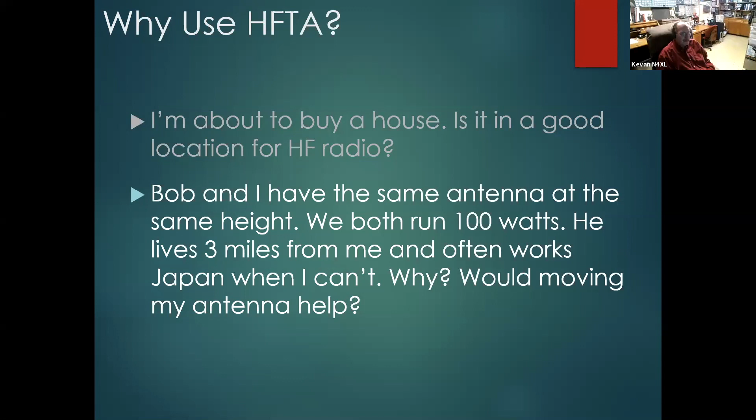I use the ARRL Antenna Book quite a bit for different things. There's operating instructions for HFTA. When I wrote this it was version 1.04, I don't know if he's changed it or not, but if you read those little instructions that accompany the program that nobody ever really reads, there's a few interesting things in there, and we'll talk about them later on at the end. And we got a couple 3D things to take a look at, some other stuff to take a look at.

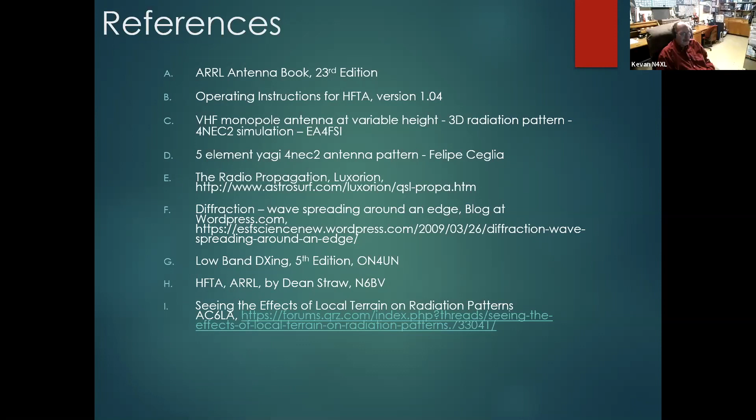The actual program HFTA, if we've got time at the end of the hour, we'll run a couple of things and show you how easy it is. We'll talk about some of the things that have happened since Dean wrote it. Some other people are getting some interesting uses out of HFTA for 360-degree angles and things.

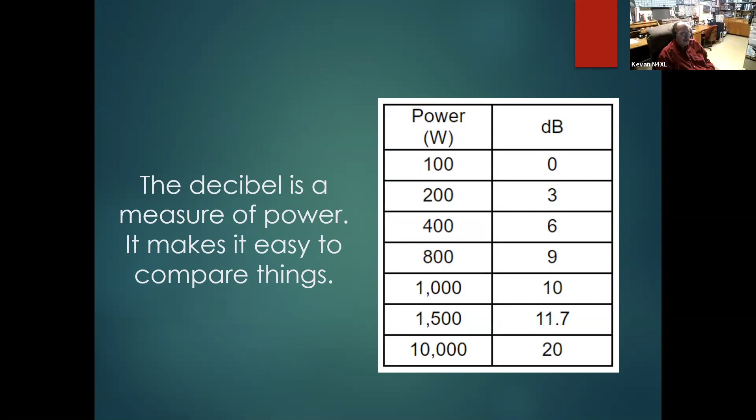A lot of people think the decibel's a hard concept, or they don't really know what's going on about it. So I want to take a minute and make sure everybody's up to speed here. And decibel, in the case we're looking at, is really just kind of a measure of power. It's a way to easily compare things. If you double power, like going from 100 to 200 watts, doubling power is 3 dB. By the same token, halving power is minus 3 dB.

So a lobe, we're used to thinking about it going in a direction like this, due north. But a lobe actually goes in a couple of different directions too. We have these things called takeoff angles, which is from where the transmitter is. We're looking at the angle between the radio wave going off and the earth. And this is a very low or shallow takeoff angle. It tends to go a little bit further.

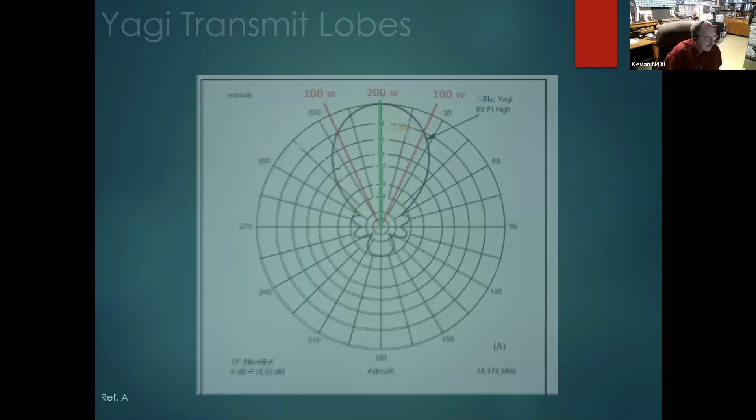The higher angle ones go up, and they do a little bit shorter hops. So that's what we're referring to as takeoff angles and arrival angles. They're pretty well reciprocal as they come in like that. And different distances, different points on the earth are going to have different takeoff and arrival angles.

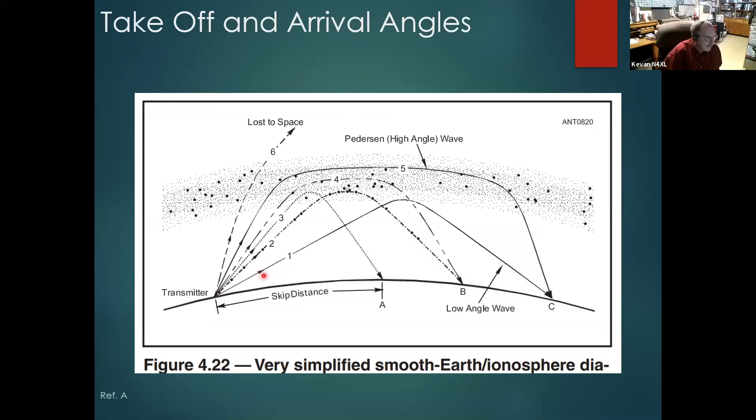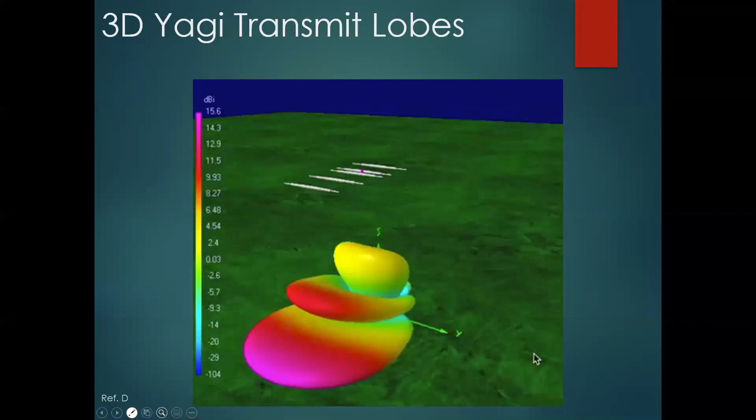Here we go again. Sounds like you may be having a connection issue. We're not seeing your screen right now. We could hear your audio, but not seeing your screen. What is going on? I've given 2 presentations on Zoom since getting this new internet without a problem. So I don't quite understand. In the Army, we said Murphy and 1-arm push-ups. Are you seeing the screen now? Yes.

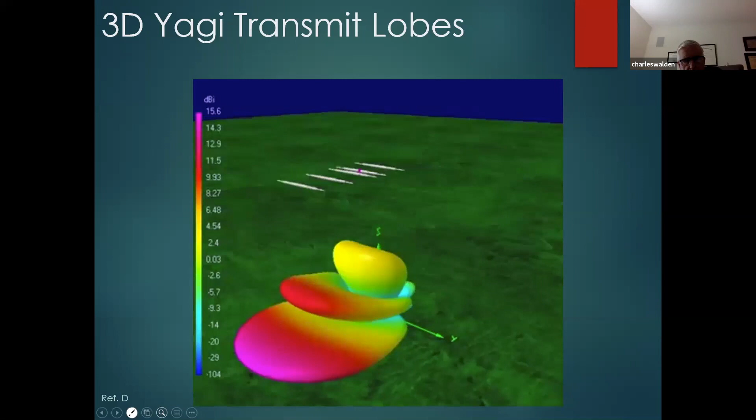Okay, so this is a 5-element Yagi. Hopefully this will stop doing whatever the heck it's doing. 5-element Yagi, and it's showing the lobe strength. This is your main lobe, and then as it goes up, you see some different changes to it. So the Yagi pattern isn't just one particular straight lobe. And this is looking at the back part of it over here.

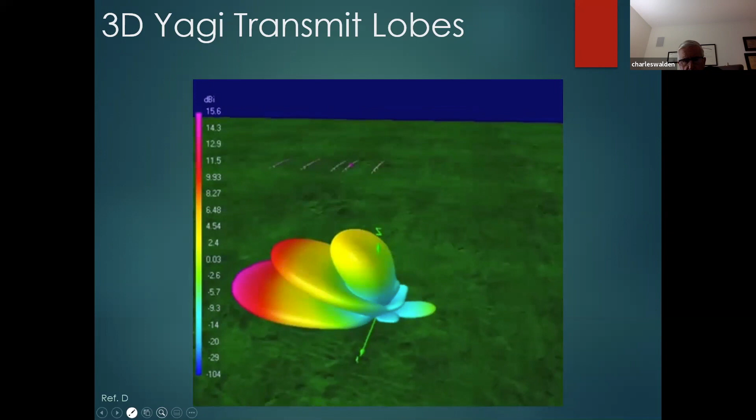There's all these different lobes coming up. And these lobes hopefully line up with the takeoff angles coming in, so you get the strongest energy coming in. Not only do you have a directional lobe, this is actually a 2-meter ground plane antenna, but as the height goes up, you also see the lobe changing as well. And when this started out, it was at about 0.6 dB. So while you're watching these lobes change, also look, you see a dBi gain change too.

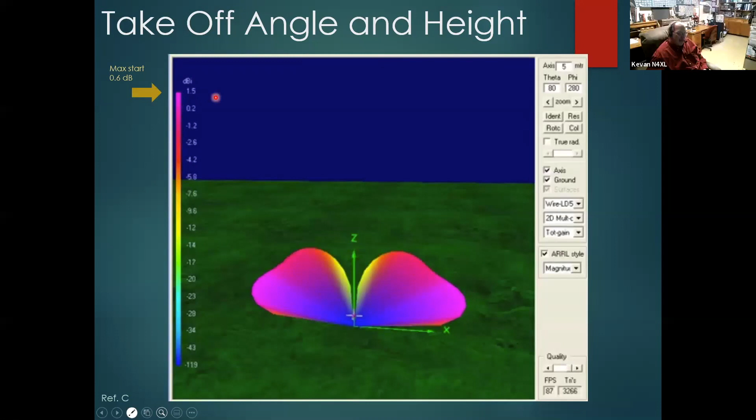So particularly new hams don't quite realize that the height of the antenna affects both the gain and the takeoff angles associated with the antenna. And a lot of times, I did for the longest time, tend to think that there isn't any reason why an antenna at 30 feet shouldn't operate almost as well as an antenna at 60 feet. More experienced people know that's not quite the case.

Gonna let this run its course, be about another minute or so. It's kind of interesting to watch. I put it down a little bit. But if you're not getting the proper response out of your antenna that you think you might, then exploring the antenna height is a good way to look at it. And as it goes up and down, things change. So that's pretty much what we're looking at for two different things. You got multiple lobes, and as you raise the antenna up and down, you change the angles that those lobes are going out at.

This comes out of ON4UN's book, and it talks a little bit about the arrival and takeoff angles. There's other sources for it. I just chose this one because it's simple. And if you look at the case for the USA East Coast, most of the time going into Europe, things are arriving at a 1 to 38 degree angle, with this thing in parentheses, 6, being the most common. And this is for a 40 and 80 meter path. Of course, there are all kinds of variances, and we'll see some of them later.

Going to Oceania from here, it's extremely low angle, like 1 degree. And the same as South Asia. I have a heck of a time getting into Oceania and South Asia, and that's why, because of the extremely low takeoff angles. But these charts are out there to tell you a little bit about what the takeoff angles are too.

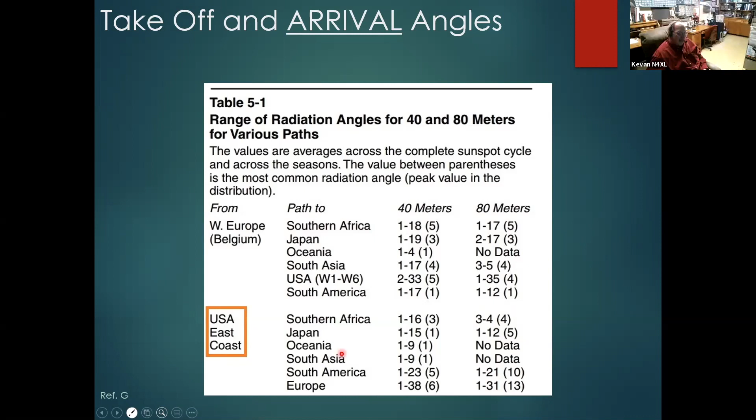Dean Straw came up with this great tool. A lot of people are familiar with this. It comes out of the ARRL antenna books. And it shows, in this case, 80 meter heights for a dipole. 1/8 wavelength high is 33 feet, 66 foot is a quarter wavelength, etc. And this shows the gain at the particular takeoff angle. And you can see as it goes up in height that these lobes start coming down.

Most US comes in about this range. Most DX is a much lower angle range. And that's kind of important as we go along. If you zoom in at this a little bit more, what Dean did to come up with some of his charts is he actually flipped this on its side. And now what you're getting is a graph which shows the takeoff angle right here. And then we can start plotting the gain at a particular takeoff angle on a chart that looks something like this. So here you got your takeoff angle, 0 to 25, and the gain coming up along those directions.

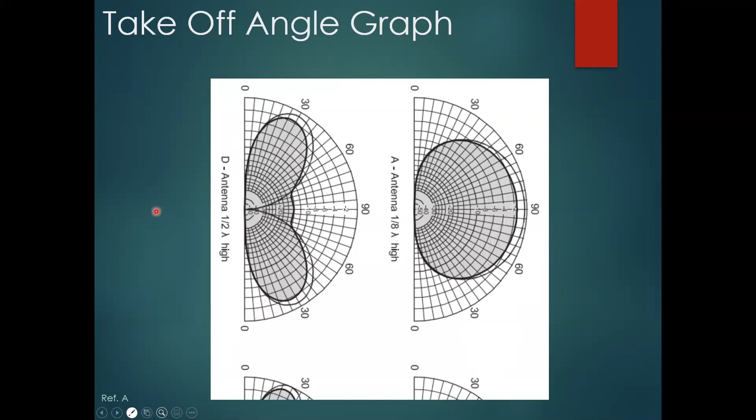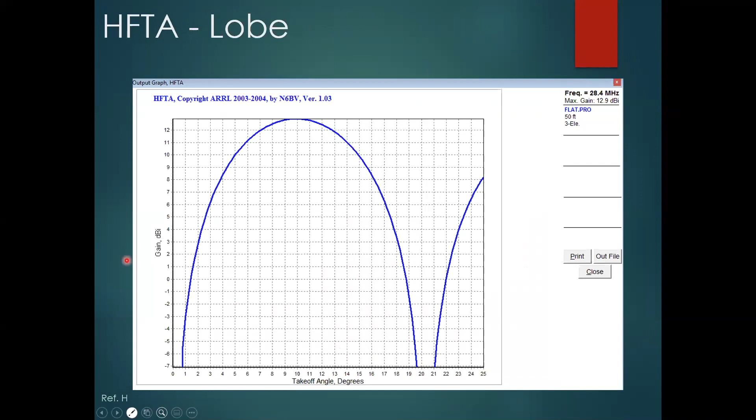And if you go ahead and put that in there, here are some of the lobes and the gain that occurs at every particular takeoff angle. And just as a reminder, we looked at that just a minute ago and turned it on its edge. This right here is that main lobe, and then you got a second lobe right there. It's plotted coming up from there. So now we got a way to start looking at what the gain is at a takeoff angle in a graphical format. Beyond those takeoff angles to different parts of the country, this starts throwing in what percentage of the time a signal comes in at 7 degrees.

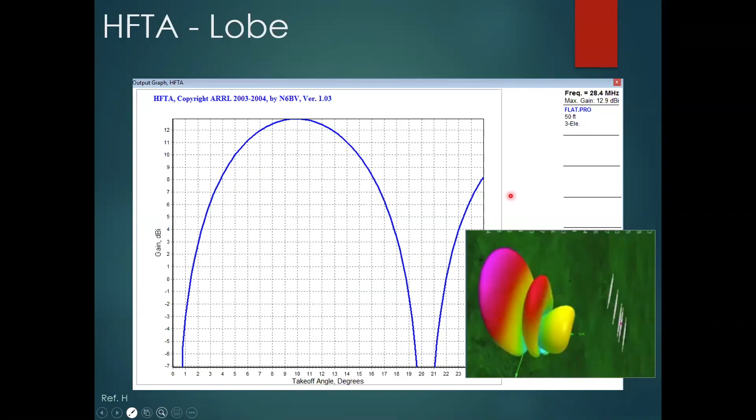This is going to be a long session. Comes in at 7 degrees. Yeah. Okay, is it appearing right now? I said, I apologize. I've never had this problem in any presentation yet.

So it comes in at 7 degrees 10% of the time. At 20 degrees, it only comes in at 2% of the time. So what we're going to want to do is try to get that lobe of the antenna to cover the angles that are coming in the majority of the time. And that's what we have right here: we overlay these gain lobes over the takeoff angles.

In this case, I'm using a takeoff angle screen, which shows South Carolina to Europe, and you can choose the different areas that are available out there. And this is over flat terrain at a 50-foot elevation. And the other thing I'll point out here is there's something called a figure of merit.

What Dean did is he's trying to come up with a value that says, okay, you got a gain here at that particular takeoff angle, you got a gain here at that particular takeoff angle, and he's using kind of like calculus to figure out how well this particular curve does over the majority of the takeoff angles. And we'll start seeing how things don't work out in the next couple slides, hopefully, if this thing stays with me.

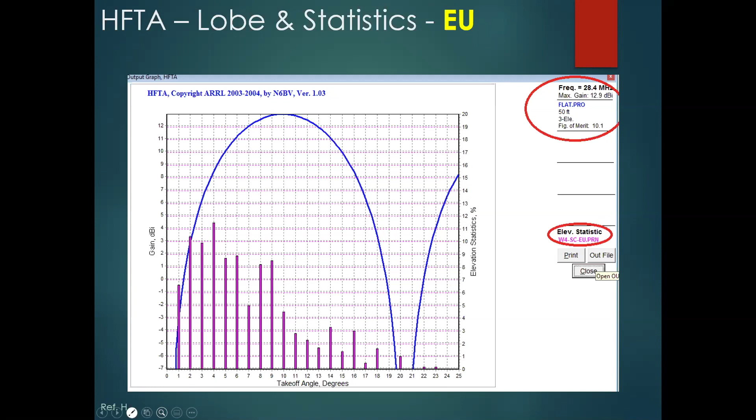This is looking at two curves for an antenna at 30 foot versus 70 foot. Obviously, the gain that occurs at the higher angles is going to be the lower antenna. The blue is the 30 foot. It has a figure of merit of 5.4, but going up to 70 foot, you get a figure of merit of 9.9. So it's worthwhile in this case, obviously, going from a 30 to a 70-foot antenna.

Again, we're looking at European takeoff angles. And you got to do that comparison for each one of the areas that you're going to, Asia, Japan, Africa, South America, to get the overall picture of what's going on, unless you just want to try to work one particular direction.

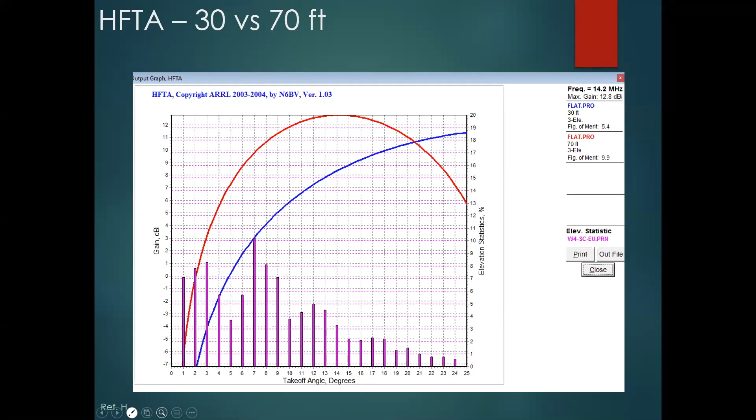A lot of people say that a higher antenna is better, and they'd love to have a 180-foot antenna. So I laid these three out, 50, 70, and 180 feet. And if you start looking at this, this lobe right here at 180 makes it so that sometimes that 70-foot, sometimes that 50-foot antenna just whoops the crap out of that one up there at 180. In fact, the figures of merit for all three of these are pretty close.

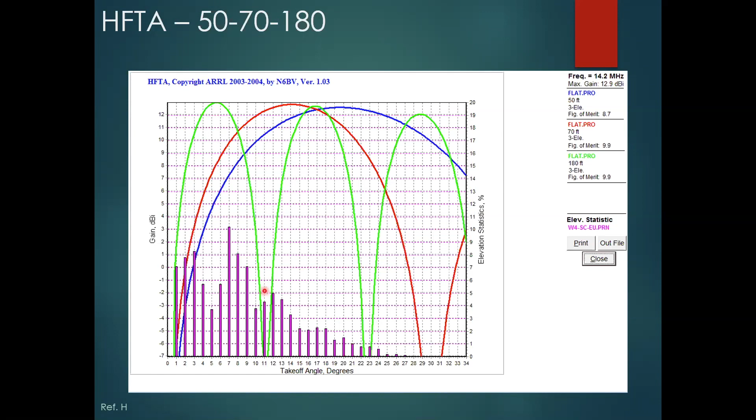And if you look at the next thing, this right here gives you a 20 dB gain just with a 70-foot antenna, and pretty much a 50-foot antenna, over something that's at 180 foot. That's one reason I don't give up being a little pistol station trying to go up against somebody with a big antenna. Now, if they've got stacks and cover all these angles, that's a different story. But sometimes, not all the time, I whip up on them boys with the big antennas, and that's one reason why right there.

And if you run them at the same time, you get an extra couple dB. And that's why people like stacks, because you can cover this whole direction. And oftentimes, one or the other antenna beats the other. All righty, so we left off talking about the two and how they add together to give you a couple extra dB. And that's basically how a stack will work as well.

I've heard of people who did stacks and put them up and they didn't work worth a darn and they couldn't understand it. Well, they fed them out of phase. And when they did that, they ended up changing the lobe pattern. And when they started running them like that, obviously it made it much worse. So that was kind of interesting too, to have HFTA show you that.

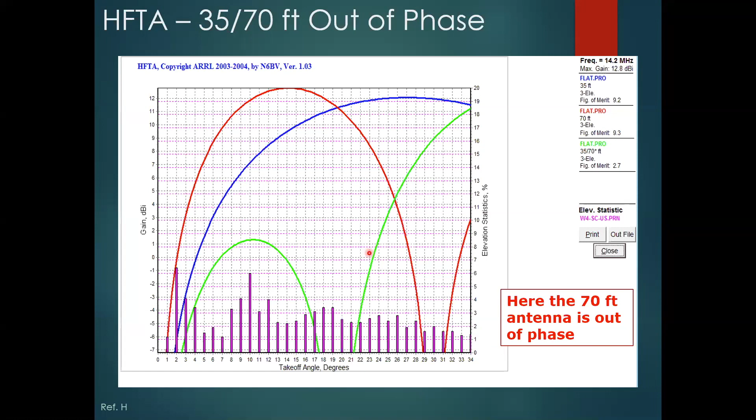The thing about HFTA, which really makes it useful besides those plots, is that the terrain around you has a direct effect on it. Your antenna signal sends stuff off and bounces off the ionosphere, but it also sends it down here to the earth and sends it up. And then these things interact up there in the air and it changes your antenna signal a bit.

And one thing that works on that, I found this picture kind of interesting. Some waves are coming along in this direction, but notice when they hit a point, they change direction and it actually causes a deflection at a different angle. And that actually happens with the terrain and a radio signal just as well. It hits a high point and starts going off in different directions.

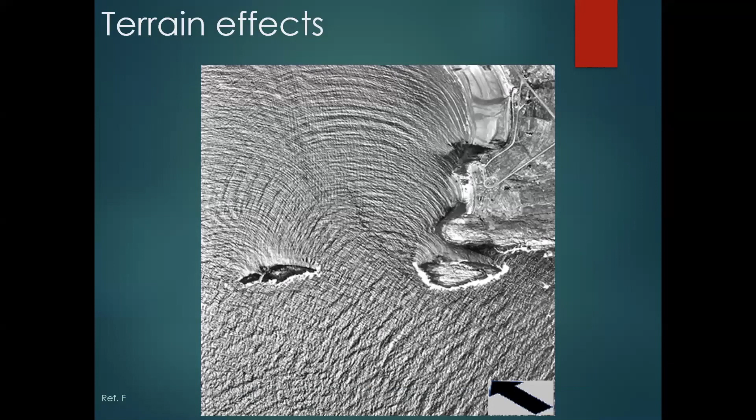And Dean Straw's whole point about HFTA was to figure out how all these little terrain effects affect the signal going off in the air. Because these things come down here and they add up, going directly there. You also get the ones coming down here that add up, back and forth, and trying to figure all that stuff out, it's quite the task that he went through.

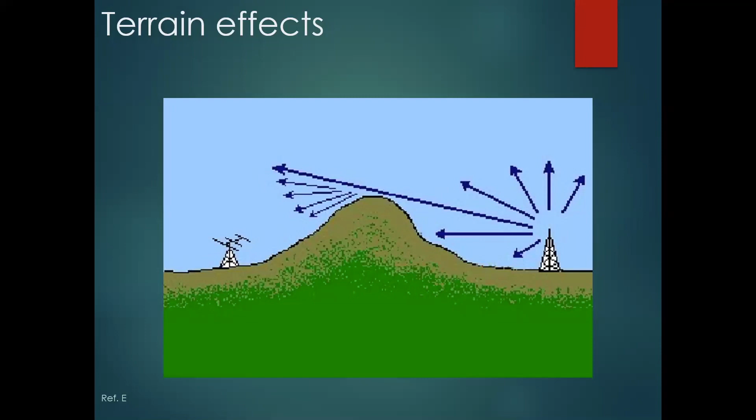And you can get these terrain profiles from a couple different sources, direct from the USGS. If you go to MicroDEM, there's some information in there on how to get them. K6TU has a good website, and all you do is put in the latitude and longitude of your antenna to 6 places, and he'll generate the terrain profiles for you and send them to you for free. He does have some more advanced features that he charges for on a yearly basis, but you can get these terrain profiles for free from him, and he'll email them to you.

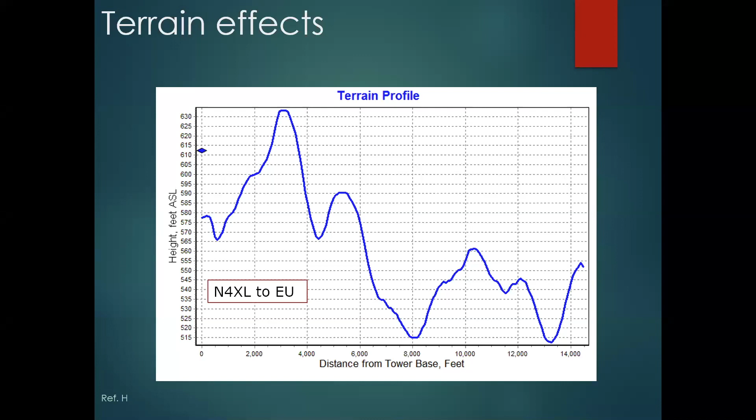So that was to Europe. And this one shows my terrain to South America. Much more sloping downwards, and I actually do have better antenna performance to South America than I do into Europe. And I come up with these at 360 degrees around the QTH, but I chose the ones towards the main directions like 45 and 320 to get to Japan and South America and analyzed those.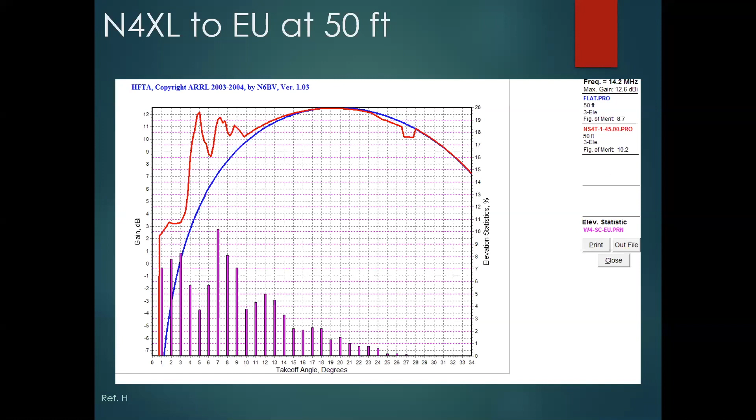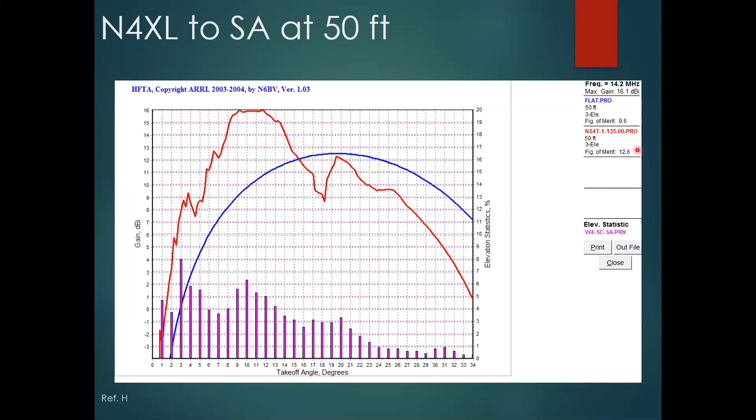So I'm going to have to choose an antenna which gives me the best compromise for 10, 15, and 20 meters. And by the way, this worked in 40 and 80 if you have horizontal antennas too. HFTA only worked with horizontal antennas. So when I started looking at this, I said, well, the 70 foot's a little bit better. Not significantly, but it is a little bit better.

When I started looking at how it compared to the US, they're almost identical. So I don't gain much if I want to focus on domestic contests by going from 50 to 70 foot, and I gain very little going to 70 foot going to Europe. When I changed frequencies from 20 meters to 10 meters, I actually found that I have a figure of merit much better going to Europe on 10 meters at 50 foot than I do at 70.

So that again lets you know you need to analyze each one of your frequencies in the directions of your interest, and then get the overall big picture as to whether it's better for you or not. As I ran through everything, I decided that basically a 50-foot antenna was just as good as a 70-foot antenna for me at this location. And it wasn't until I got a tower up to 90 foot that I actually began to see an improvement.

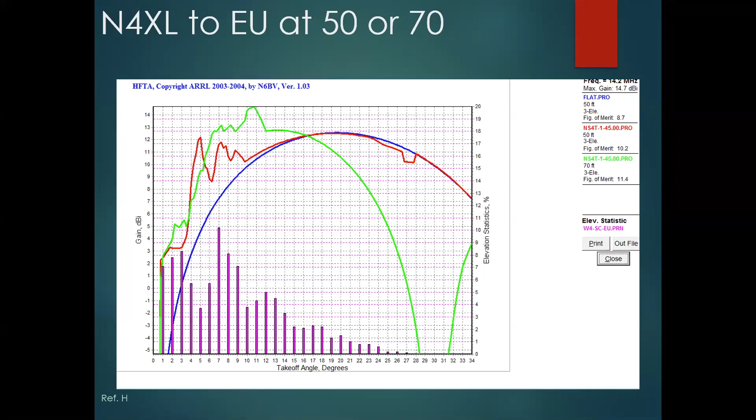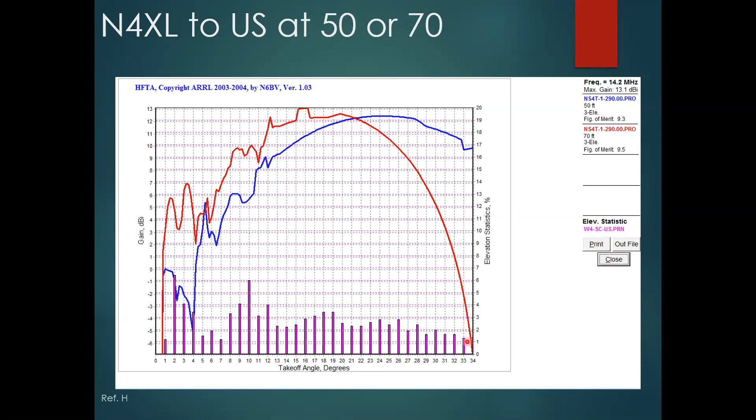So when I went through all these particular charts, I did it for 10, 15, and 20 meters. I did it to the main locations of Europe, to Japan, to South America, and I did it to Africa, although there aren't that many stations over there. I focused on the first three, and I printed out charts for 10, 15, and 20 at various heights, 50, 70 foot, even at 35 foot, just for the heck of it.

I laid them out on a table and I looked at them all and I compared all the figures of merit. What I found out when I looked at every one of those particular systems is I get maybe 5–10% improvement going to 70 foot over a 50-foot antenna. And in fact, as I mentioned, I'd have to go up to 90 foot to really start seeing a significant improvement, making it worthwhile.

So since I didn't get that much of an improvement with 70 foot over 50 foot, I just stuck with a 50-foot tower. They're much cheaper. I have less trouble trying to maintain a 50 foot than a 70-foot tower. And I get basically the same performance out of it. So that was the decision process I came up with.

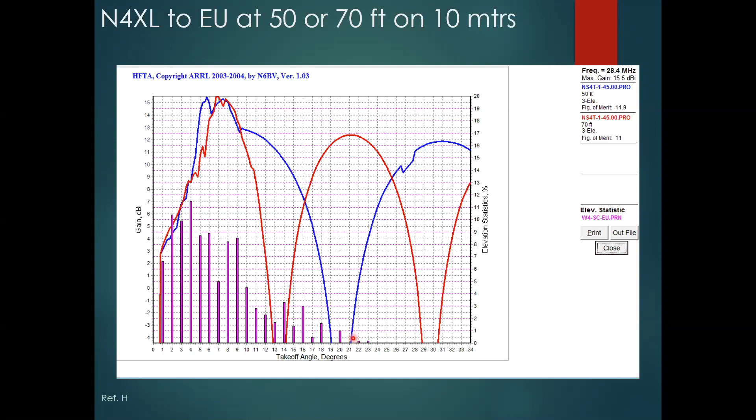Now, again, if you've got dipoles, wires, or whatnot, as long as they're horizontally polarized, you can use HFTA to figure that out as well. And if it's a multi-band dipole or G5RV or something, you can kind of do these comparisons as well, although there is a vertical component to a G5RV, so it might not be too accurate with HFTA. Using HFTA, like I said, I did a compromise height based on all three of them and examined the performance in several directions. And if you can put up more than one antenna, see what combination works best to cover most angles.

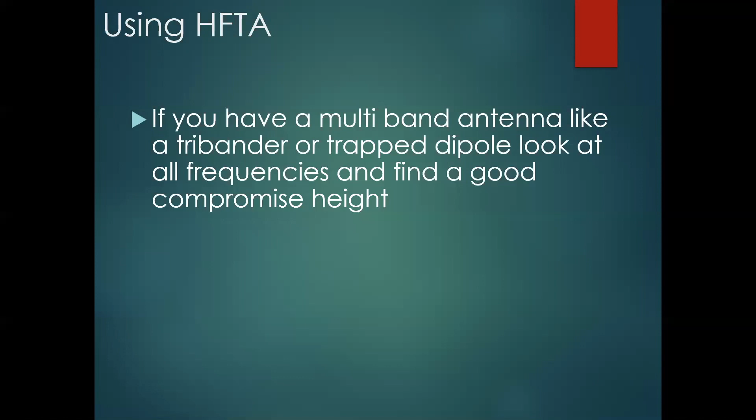I'm a big advocate of having more than one antenna for every single band that you contest on, and that's why, so you can cover those takeoff angles that the other one doesn't. Extremely important, I think, to improving it.

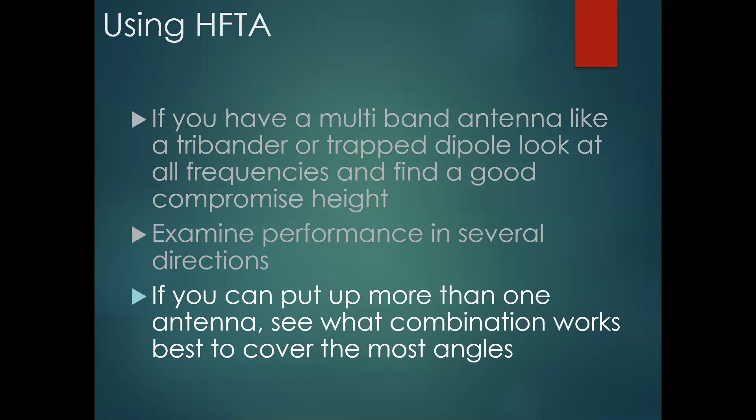This is the K6TU website. They have free terrain downloads, and they actually have VOACAP propagation predictions, which you can upload into their system, your terrain profiles, and it'll work to give you actual accurate VOACAP projections out of the data that comes from the HFTA calculations that's done on K6TU.net. They also have that program MicroDEM.

You can do this and that and figure out how to get your terrain data, but that's very complicated, and I don't advise that. If you need to, look in the Antenna Compendium book. I think it's either 7 or 8. I don't remember which one it's in anymore. I talked about how to do that in there.

If you read the notes that N6BV has out there about HFTA, he says, don't fiddle around worrying so much about 1 or 2 dB here or there, because his calculations are only accurate to 3 dB. So if you're off by a couple dB, don't worry about it.

Also, I laid this out a couple times just to prove it. I put in my antenna at 120 feet, and I also ran a program at 119 and 121 feet, only 1 foot difference, and found a few places where there was a 3 or 4 dB difference in the results. And Dean says, verify your results by plotting those 3 points and throw out one if it doesn't agree with the other 2. And that's in fact exactly what I've seen.

So don't just do it once you get your decision process made. Go ahead and run it at a couple of different heights and make sure that the height you've got is accurate for the prediction program.

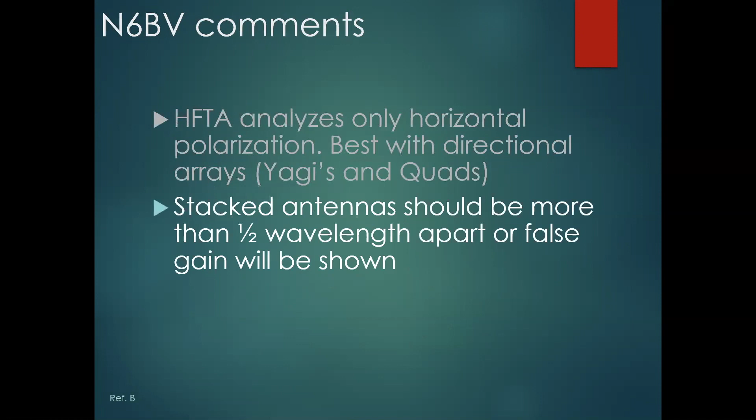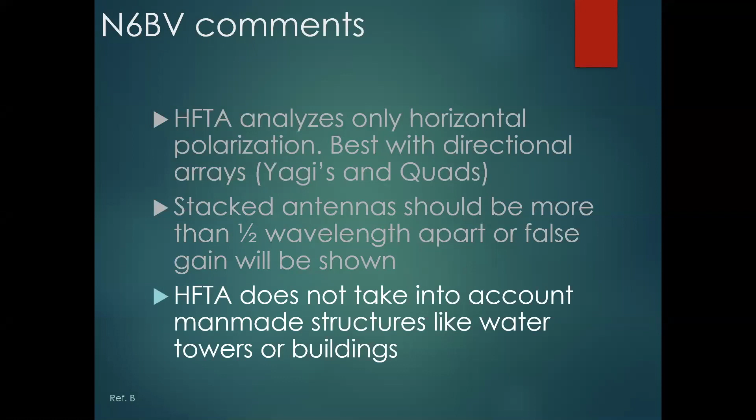Dean, when I was talking with him and on the internet, made a very big point about this particular concept. He says, these elevation angles were computed for all times over an 11-year solar cycle, when each band is actually open. The degree to which the antenna chosen for a particular terrain covers all those angles, the more effective that antenna and terrain will be for all periods of the solar cycle. So in other words, he recommends strongly that you don't try to pick and choose how high to have your antenna at one particular time in the solar cycle.

He says your best overall performance over that 11-year period is going to be done by running the analysis we just talked about and coming up with your best antenna for that overall picture, rather than try to set something up for just 1 or 2 particular cases. He stressed that pretty strongly.

I've been talking about that figure of merit, but he puts in that it's only a snapshot of a complex situation, and it's not 100% reliable. Again, you've got that height difference causing some inaccuracies in the calculations. The figure of merit evidently has some fudge factors in it too, but I found that to be a very good metric, if you will, to determine which antenna is better.

And then you can kind of verify that by looking at the picture yourself overall. And if there's a real big difference, then obviously it's important. If it starts getting close, it's probably not that critical. But the figure of merit covers the entire range of possible elevation angles; low angles are especially important during periods of low solar activity, as you would expect, because those are the only possible modes of propagation.

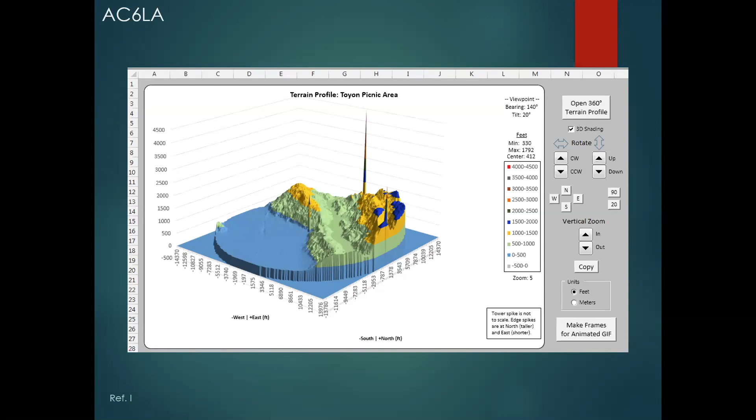He ran this through an EZNEC program, and that gives you a big picture of the actual gain based on the terrain in your area in all 360 degrees, instead of doing it in just the limited amount that I did a minute ago. And then he was also able to generate 3D plots, both for flat ground and for the actual ground around his location.

By the way, Larry, I haven't had a glitch since I haven't moved my laser pointer up in the screen. So that could be part of what the issue is. I'll focus on that a little bit later.

The thing about these three-dimensional plots, and why I'm not overly excited about them personally, is the data comes pretty much right out of the HFTA program; that's where the calculations come from. I've already done all those calculations and made my decision. But if you want a big picture feel of what's going on around your location, that's a good way to figure out where you would have your best gains and get an overall snapshot without going through the tedious procedure I did of printing them out in different directions and comparing them one by one.

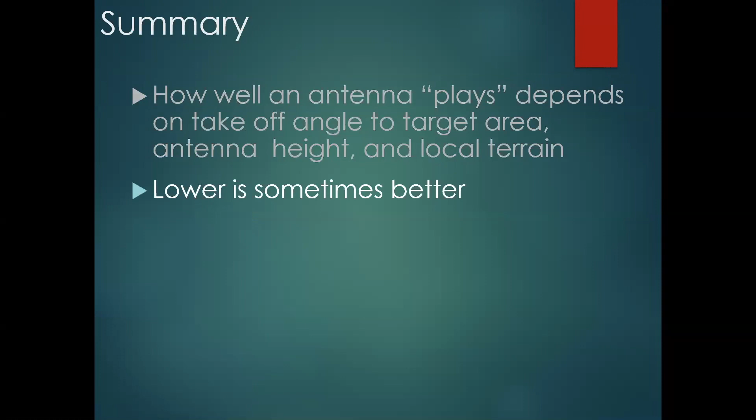So in summary, how well an antenna plays depends on takeoff angle to the target area, the antenna height, and the local terrain. Lower is sometimes better, and more than one antenna per band will definitely help your overall signal presence. Design your antenna to cover all angles. If you can't, choose what's most important to you. Do you want to work US? Do you want to work DX? No antenna will do everything.

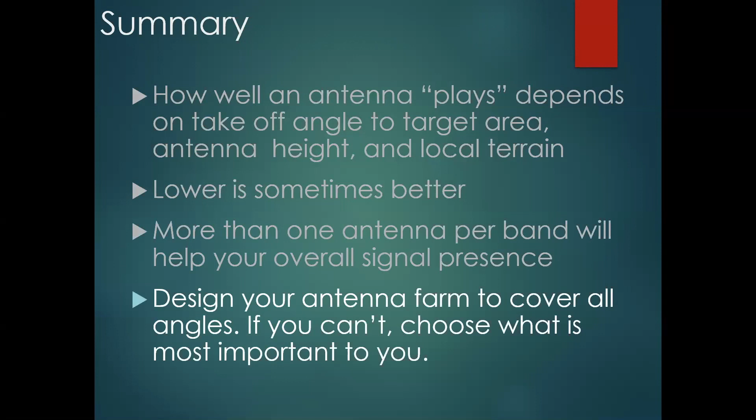When someone asks what antenna they should put up, I always answer them with a question: what is it you want to do most? Do you want to do US? Do you want to work DX? Do you look into Europe? Whatever the case may be. So figure out what you want to do and then start tackling the HFTA part of it. Are there any questions?

I can tell you, yes, there are questions. I just don't know whether anybody's asking them. So the floor is open to anyone who has a question for Kevin about any of this. I apologize for the poor performance of the presentation. This is Rob, K6KM.

I have a question. You mentioned this is only for horizontally polarized antennas. Is there anything out there for vertically polarized? I have not found anything for that. Wish I did, but I've looked and didn't find anything. Does anybody else know anything? Dean said he didn't have any intentions of developing a program for that either. Okay, thank you. More questions?

Kevin, sorry, this is Bob Tuttle, N8YXR. It's not really a question, but a comment I'd like to make. Looking at improvements at our station, I've seen not quite the same situation, but something similar to your conclusion that higher isn't always better. So for instance, in quite a few locations in Michigan, because we're so flat actually, you don't get much.

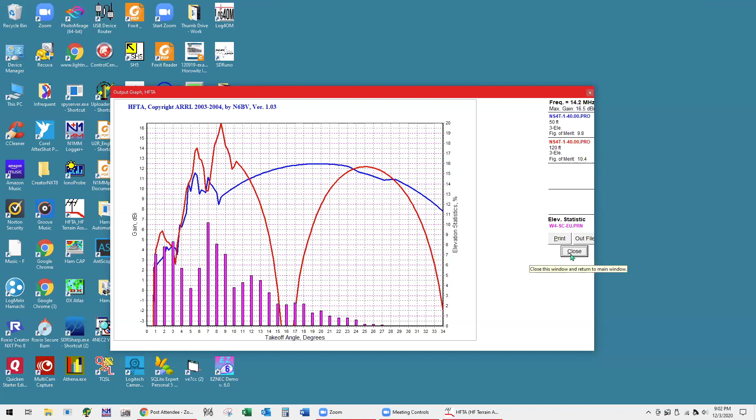You can put the same antenna height, the 50 foot going to Europe, and overlay the second one going to South America at the same time. That's how you add stacks. It's simple to play with and work out. And you can print these out to a PDF file or a picture file and then print them out and lay them out as well.

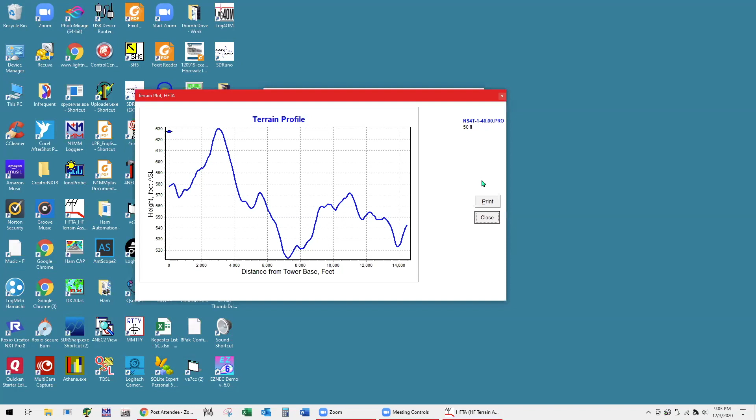Kevin, there is one question in the chat room. Okay. And that is, interested to understand the sequence of steps to generate these for my own station. Is there a tutorial on the process online? I can't answer that directly because it's been 10 years since I actually did this. What I highly suggest is go to the K6TU website, and I'm pretty certain he's got directions to how to do it.

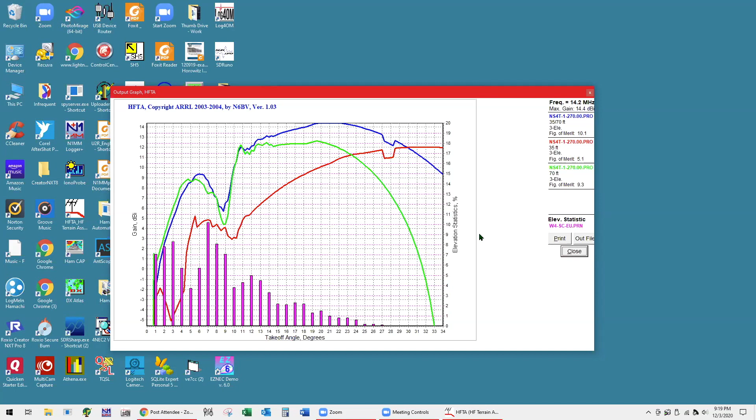And also, I'll add another thing in, Craig, you might find it interesting. We're operating at NQ4I. Jim and I were both on 40 meters running 1,500 watts, him with his 40-meter stack, and me with a 4-element at 135 feet. And we actually found ourselves on the same frequency calling at the same time, stations in Asia, for example, and the Orion 2s that he modified didn't blow them out. Yep. It's funny how that works.

I'll be running SO2R this weekend on 160. Think about that. That kind of scared me.

Okay, so Kevin, with your permission, I'd like to ask Craig a question, because I don't know how many other people in this conversation have done this. But Craig, you've been on a lot of DXpeditions. So obviously, given the limitations of the geography where you are, you have to make decisions about where you put the antennas and why. I mean, you paid a lot of money and spent a lot of time to go somewhere. So do you use any of the analysis like this? What do you do?

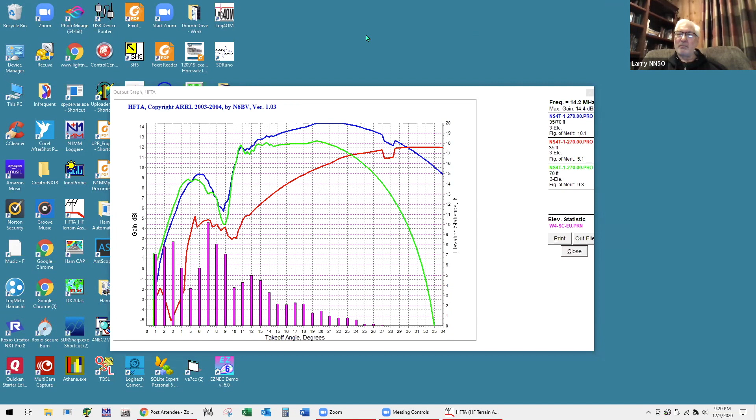Well, we plan it in advance. We know the geography before we go, and there's a lot of cases where you're restricted and you just have no choice. Palmyra Island, for instance, was terrible in terms of being restricted, as we had to have verticals and so on. But when we went to Wake Island, we had physically separated sites on purpose. So usually we'll have phone and CW separated.

If you remember when we went to Swains Island, 2 separate sites about a quarter mile apart. We went to Amsterdam Island; that was probably 2 or 3 miles apart. And so we really try to think of that stuff. When we were at Pitcairn last year, we had 2 physical sites. But you're operating in very close proximity, even within a site, and you can overload radios.

So we use filters, but we also use high power filters. And high power filters are really good because most amplifiers have a really bad second and third harmonic all by themselves, especially tubes. And so with high power filters, you're going to get maybe 50 dB of isolation if you get the good ones, the LBS or 4O3As or VA6AMs. Those type of filters are really good high power filters. So the answer is yes.